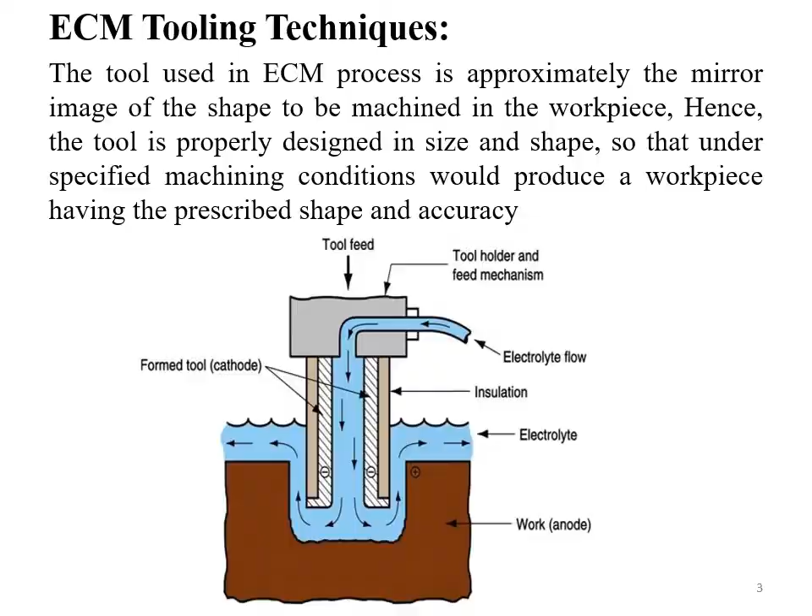Electrolyte-through electrode and insulated electrode - these two types of electrodes, or rather two types of tool configurations, can be used. In one, through the tool itself, the electrolyte is impinged or sent to the working zone, that is the machining zone, as we can see in the first diagram.

Here we can see the workpiece as the tool moves towards the depth of the workpiece. There is a peak observed at the center of the tool, because the electrolyte is passing through a hole provided at the center of the tool. The flowing electrolyte will flow to either side, forming a peak at the center, meaning machining will not happen at that center point on the workpiece.

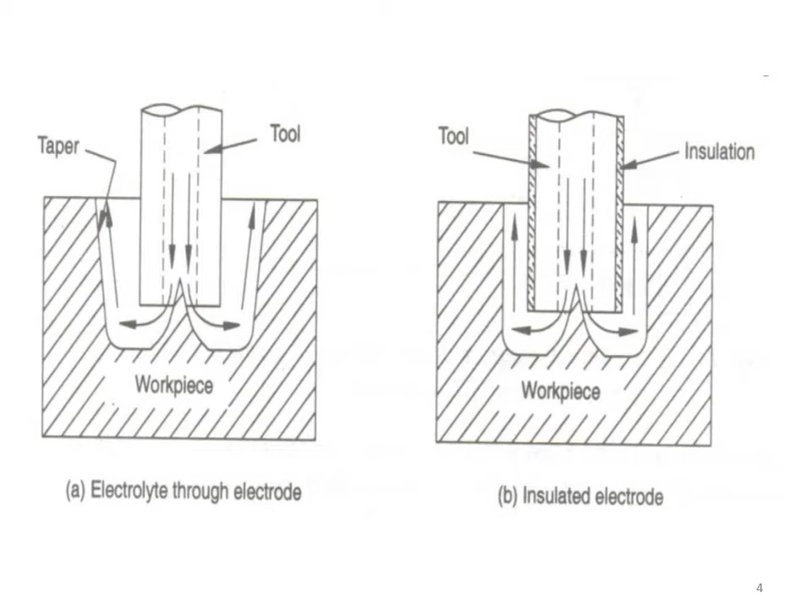Actually, in general machining process, this is being removed in the secondary machining operation. The third one is like a streamlined electrolyte flow.

Here we can observe the peak which is obtained in the last diagram, the second diagram. That can also be minimized with the help of the tool tip by providing extra insulation at the tool tip. When the tool tip is provided, it causes the electrolyte to flow in a maximum manner at its bottom, so that the material is removed with the minimum peak at its center.

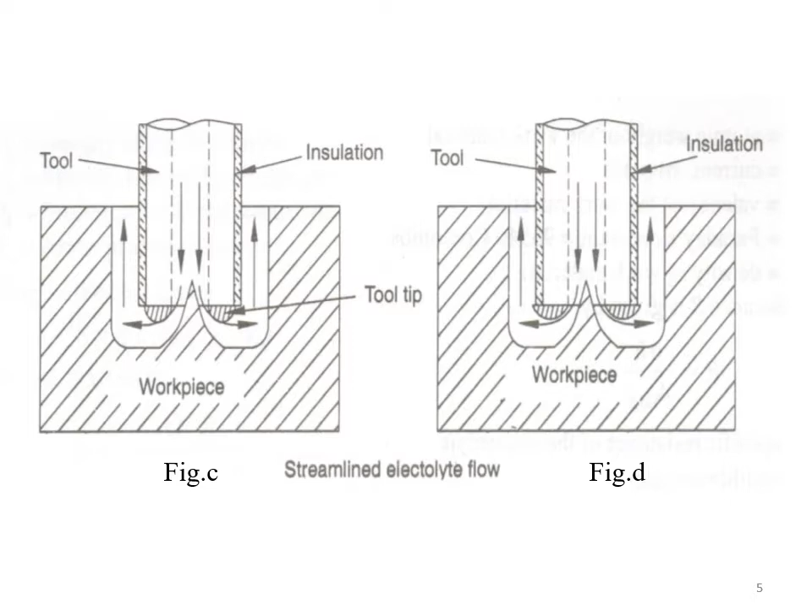This kind of electrolyte flow, we call it a streamlined electrolyte flow.

In the last four diagrams, we have seen that electrolyte will flow into the tool, or from the center of the tool it will flow into the workpiece and exit outside the tool. Whereas in this case, this is a reverse process compared to the others we have seen, where the electrolyte is made to flow from the outside and exit from the center of the tool, so that the electrolyte flows from its outermost side into the tool and gets exit from the center of the tool.

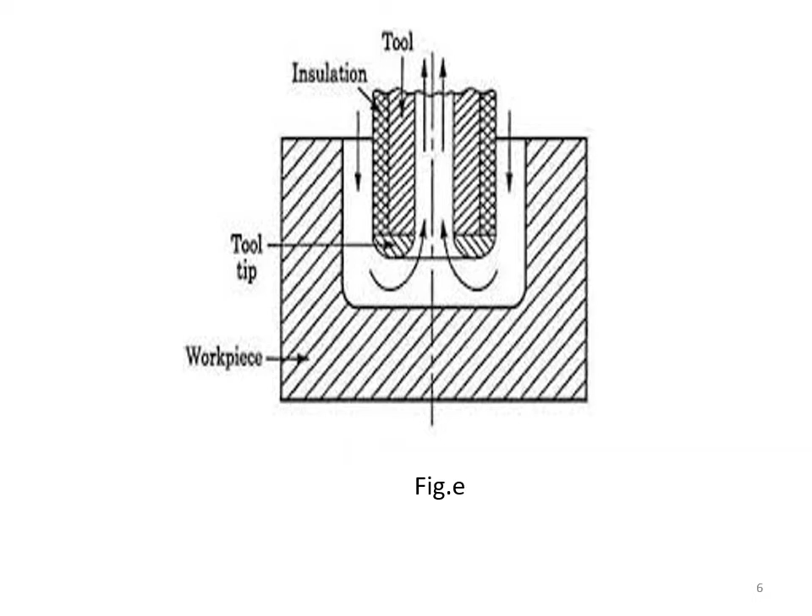It provides a better cylindricity of the hole, and narrow holes can be obtained. But it has its own disadvantages, like it is very difficult to maintain proper flow. It is very difficult to control the flow of the electrolyte. All those are some of the challenges which lie with this electrolyte flow arrangement.

Proper electrolyte circulation is essential, as you have seen even in the diagram, for accurate machining in the ECM process. The tool must be properly designed to permit a uniform electrolyte flow in all machining areas, as insufficient or excessive flows produce undesirable effects during machining.

There are two arrangements for the flow of electrolyte in the ECM process. One is divergent flow and the second is convergent flow.

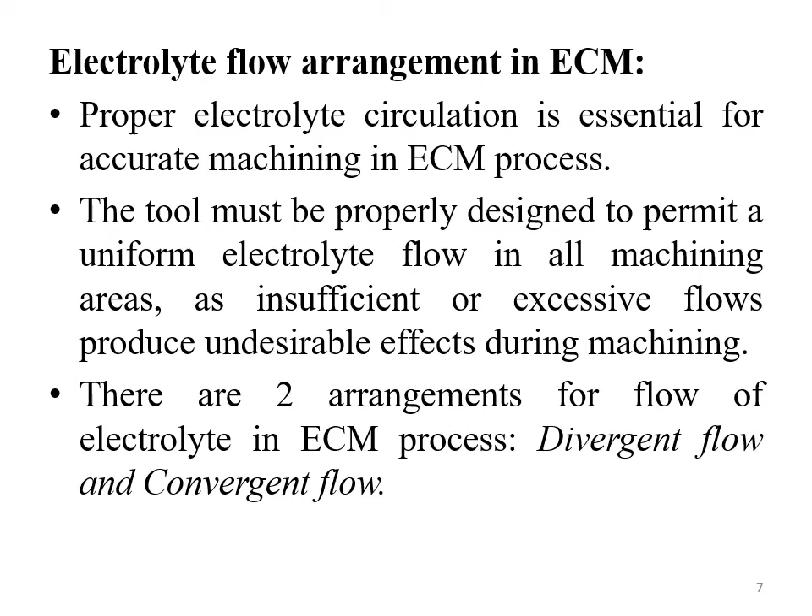The divergent flow, which is in the first figures we discussed, is what we call a divergent flow. The electrolyte is made to flow into the center of the tool, and when it gets exit, the electrolyte diverges and flows over the walls of the cylinder or tool, getting exit.

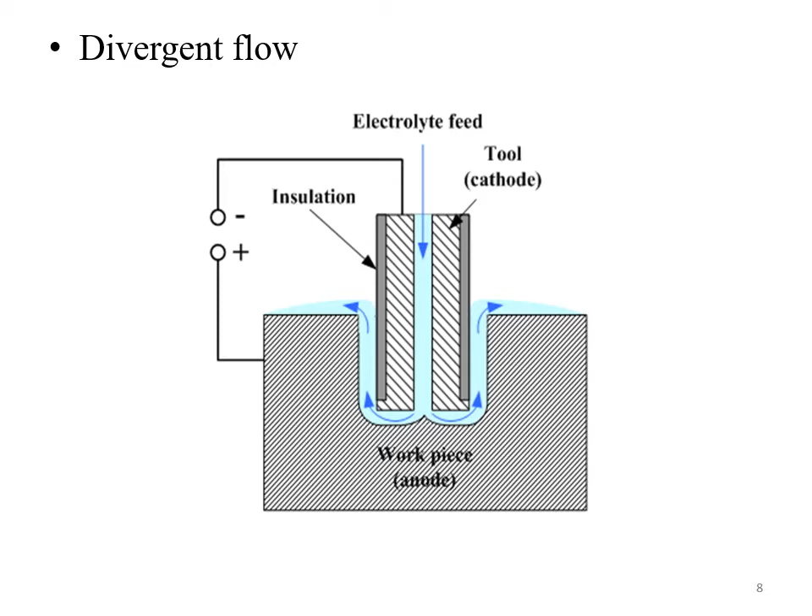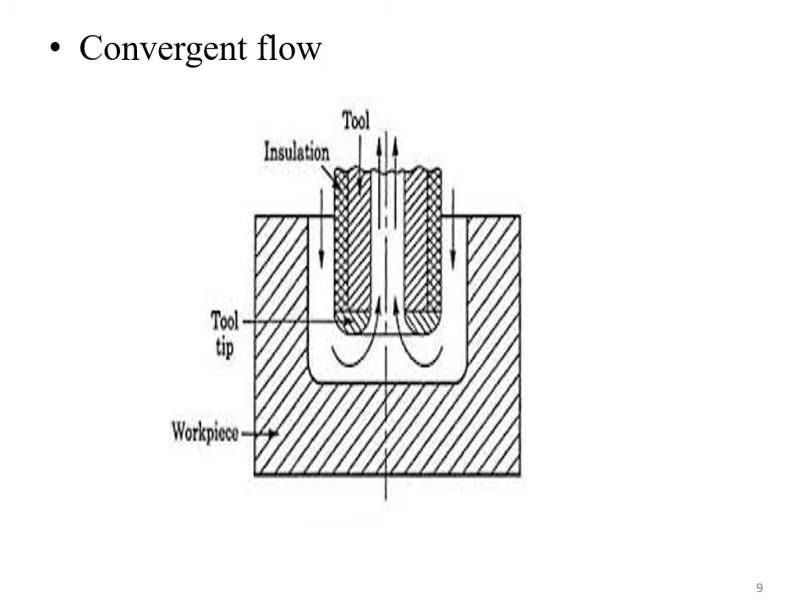Whereas in the convergent flow, the electrolyte will flow from the outside and converge at the center of the tool, getting exit from the center. This is what we call a convergent flow process. So these are the different techniques which are adapted for ECM tooling.

Next, coming to the process characteristics. Generally, when I mention process characteristics, we discuss two important things: one is material removal rate, second is the surface finish, because they indicate the quality of the machined area or machined workpiece. So machine quality is denoted by these two parameters. Further, accuracy is also another important characteristic.

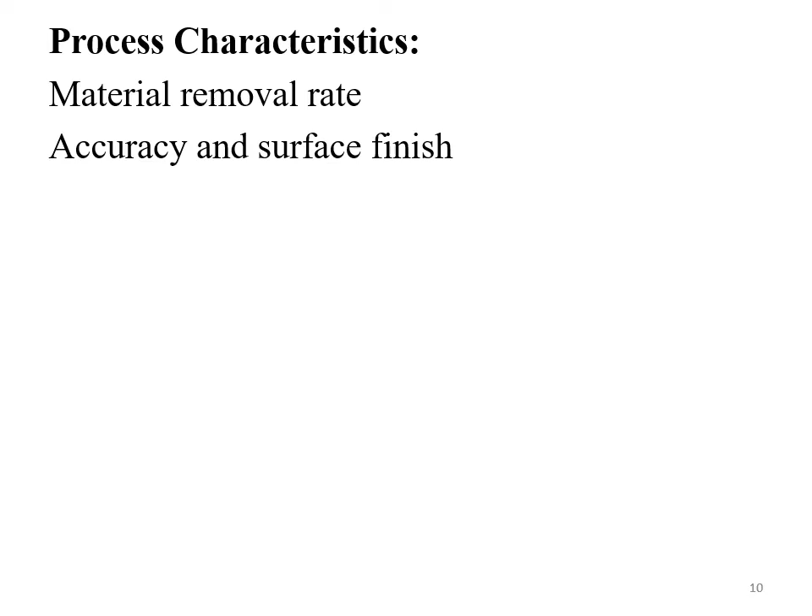Material removal rate, MRR, mainly depends on the feed rates, which determines the current that passes between the work and the tool. As much as a higher amount of energy is available at the working zone, that much material is removed.

As the tool approaches the workpiece, the length of the conductive current path decreases and the magnitude of the current increases. A stable cut is established when the current is just sufficient to remove the metal at a rate corresponding to the rate of tool advance. Proper control has to be provided to maintain fixed spacing to facilitate the highest MRR.

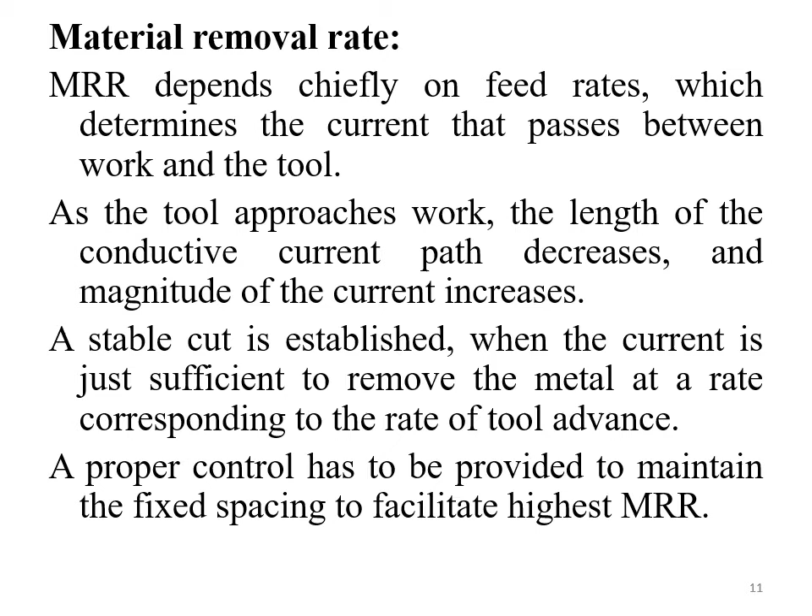Coming to the accuracy, some of the factors which govern the accuracy and surface finish are: one is machining voltage. The voltage variation changes the surface texture, as a higher voltage makes more overcut and vice versa.

Feed rate of the tool has the same effect as that of the voltage. The third one is about the temperature of the electrolyte, and the fourth is the concentration of the electrolyte. So let us consider the first one.

As I mentioned, based on the energy which is available, the material removal rate will be higher. When higher energy is available, it will cause larger displacement of material on the workpiece surface, so the crater size will be larger for maximum material removal.

When the diameter of the crater increases, the surface roughness also increases, because it increases the unevenness present over the surface of the workpiece. That's why the surface roughness generally increases with increase in current density, or the energy availability at the surface of the workpiece.

When the current energy available at the machining zone decreases, material is removed in smaller amounts per instant. This means smaller craters are formed due to the removal of workpiece surface material. An infinite number of small craters attach together to form the surface of the workpiece, and because of the smaller crater diameter, the surface finish obtained will be very good, or the surface roughness will fall down. The unevenness present over the surface will also decrease.

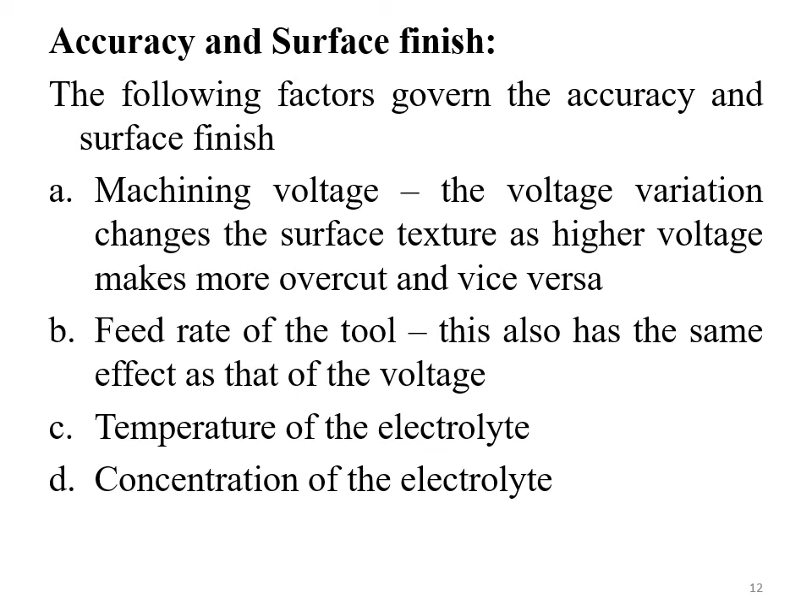Next is about the process parameters. In ECM, electrochemical machining, the important parameters are: first, current density; second, tool feed rate; third, gap between the tool and the workpiece; fourth, velocity of electrolyte flow; fifth, type of electrolyte, its concentration, temperature, and choice of electrolyte.

Let us go with the first one, current density. As I mentioned, increase in current density increases the availability of energy for removal of material from the workpiece surface, so the material removal rate also goes on increasing. Further increase in current density may cause damage to the equipment. That's why a controlled higher current density is necessary to favor higher material removal rate, but also need to consider the required surface finish. Based on that, the optimal current density value has to be set or considered for operation.

Next is about the tool feed rate. Tool feed rate works in the same manner: the higher the tool feed rate, the better the material removal rate, but poorer the surface finish. At the same time, higher material removal rate is often desired, so a secondary finishing operation is done to remove surface material from the workpiece so that a better surface finish can be obtained.

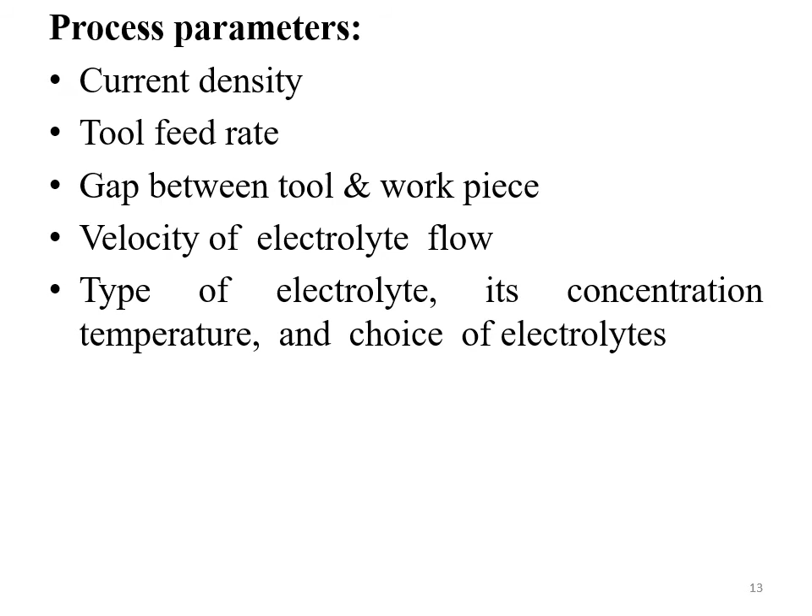Again, regarding temperature: the higher the temperature, the catalysis action takes place, and because of this the acceleration of the chemical reaction occurs, further increasing the removal of material. As for the choice of electrolyte, different types of materials are suitable for different types of electrolytes. So based on the type of workpiece being used, the suitable or appropriate electrolyte is chosen.

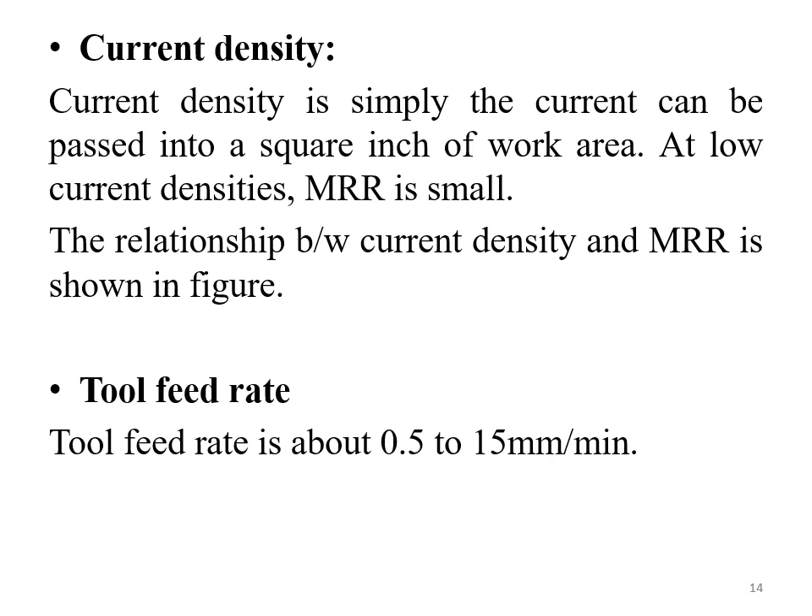Further, tool feed rate is about 0.5 to 15 mm per minute, which is the optimal value of tool feed rate employed. The current density, as mentioned, is simply the current passed per square inch of work area. At low current densities, MRR is low or small; at higher values, the MRR will be higher.

The gap between the tool and the workpiece is positioned as close together as possible to encourage efficient electrical transmission. A small gap results in higher current densities and more MRR. The gap size should vary from 0.25 to 0.76 mm, and a gap of 0.25 mm is often used. It is also important to maintain a uniform gap between the tool and the workpiece, since any physical contact between them will cause serious damage to the whole equipment.

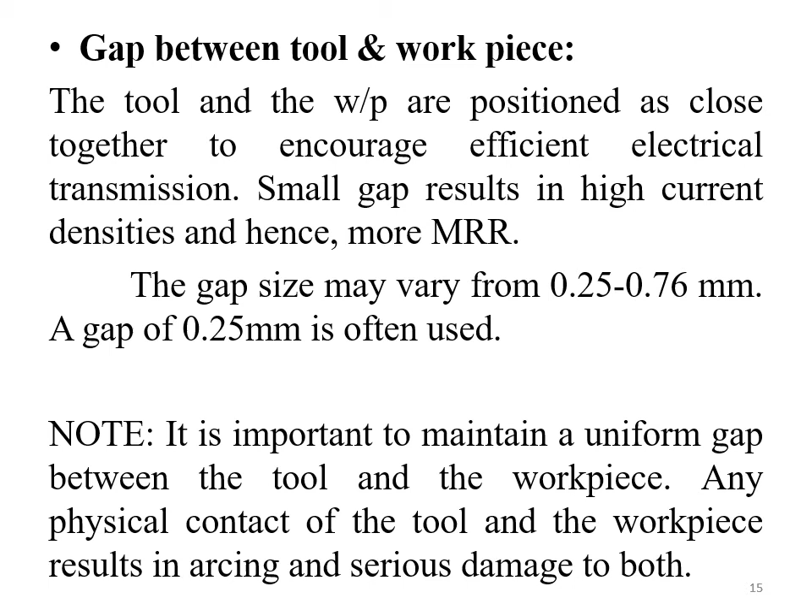Velocity of the electrolyte flow should be in the range of 15 to 60 meters per second. If the electrolyte flow is too low, the heat and byproducts of the electrolytic reaction build up in the gap, causing non-uniform material removal. Further, high velocity will cause cavitation, a serious issue where high velocity fluids flowing over surfaces cause bubbling or cavitation. In the same way, when the electrolyte is transported at a very high rate, it causes cavitation on the tool itself, so that the tool also gets worn out.

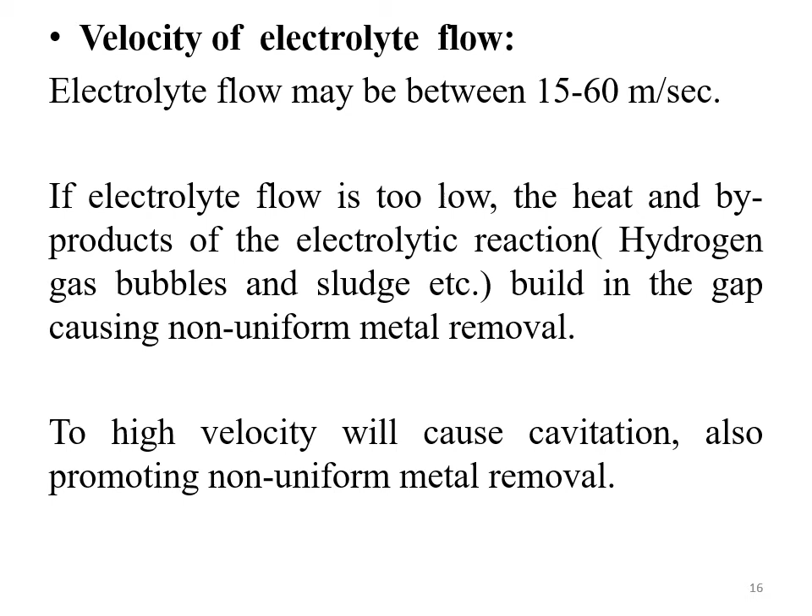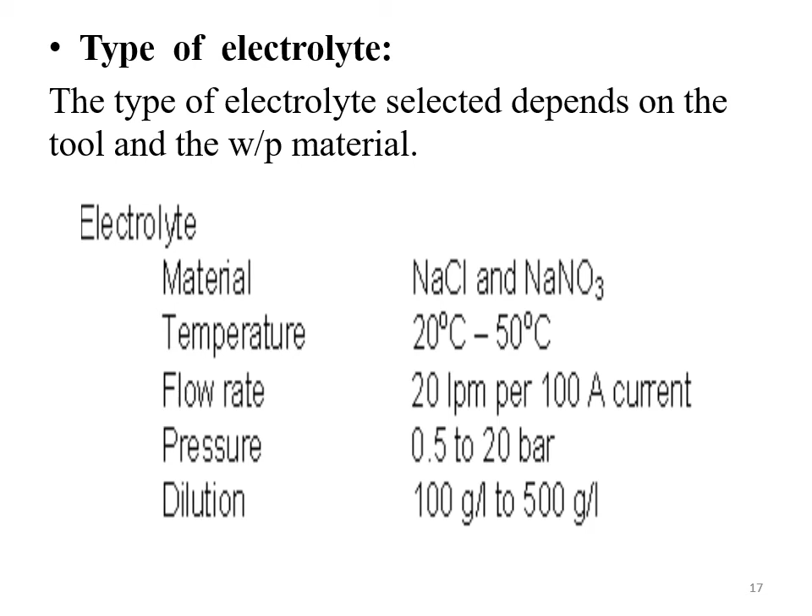That's why an optimal value of velocity also needs to be maintained. Types of electrolytes, like materials NaCl and NaNO3. Electrolyte temperatures are in the range of 20 to 50 degrees Celsius. Flow rate is 20 liters per minute for up to 100 amps current, a very high current. Pressure is 0.5 to 20 bars. Dilution is about 100 grams per liter to 500 grams per liter.

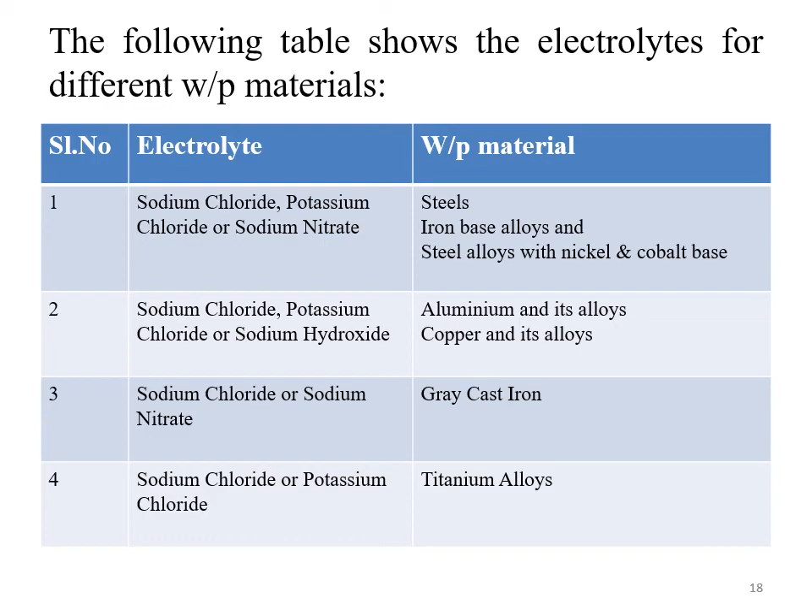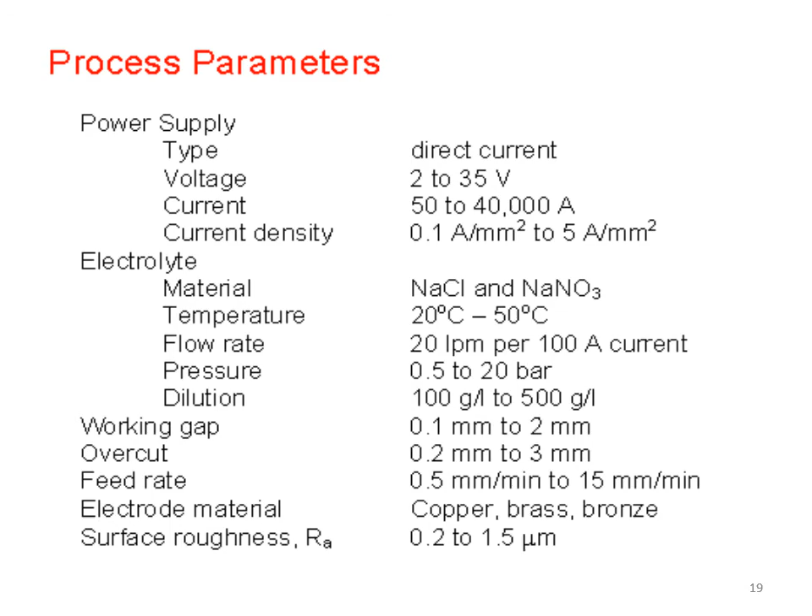These are some of the process parameter variables which can be considered as optimal within the range. The general machining is being done. ECM machining is done using tool and insulation materials.

Insulation is also very important in the control of electric current, because high current is being employed here. Generally, the simplest method of applying insulation is by spraying or dipping. Teflon, urethane, phenolic, epoxy powder coatings, and other materials are commonly used for insulation, and sprayed or dipped coatings of epoxy resins are amongst the most effective insulating materials.

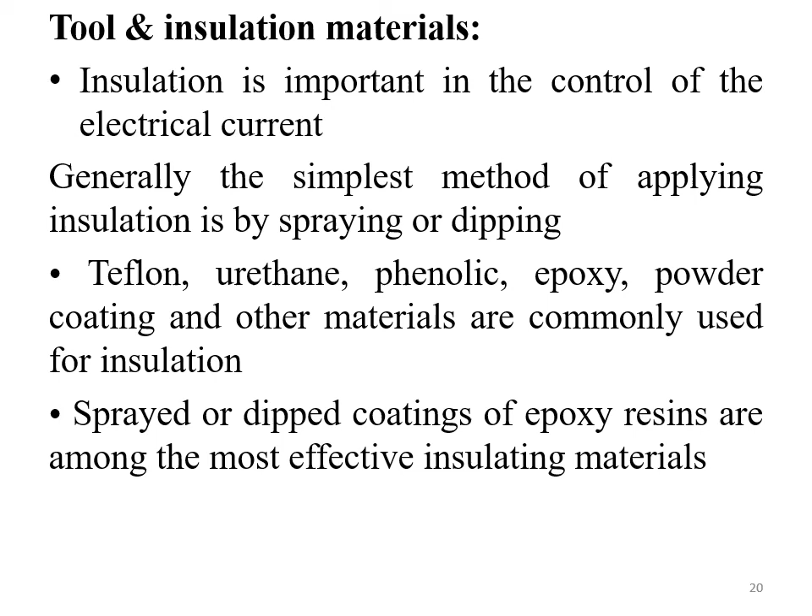Advantages: accurate shape with better surface finish can be obtained. Machines complicated shapes in a single pass. Capable of machining metals and alloys irrespective of their strength and hardness. There is little or no tool wear.

The process can be easily automated, giving good surface finish, accuracy and tolerance. Low machining time. Deep holes can be made by this process, and it is suitable for mass production applications.

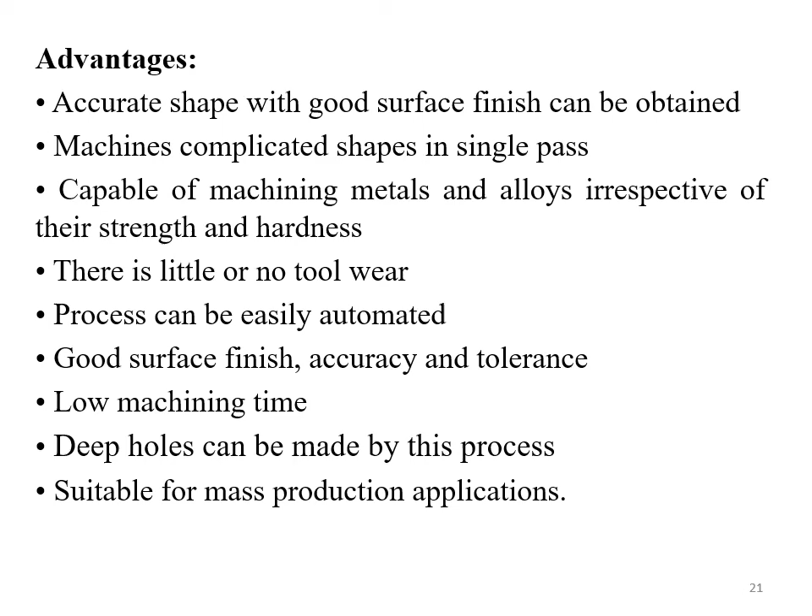Coming to the limitations now: ECM is mainly suitable for only metals, or nothing but electrically conductive materials. High electric power is consumed, so a high amount of energy is utilized here. Maintenance cost is also high, because high maintenance is a necessary aspect here. High tooling and setup cost increases the initial cost of the whole setup to establish an ECM setup.

Post machining and cleaning is a must to reduce the corrosion of the workpiece, or else whatever chemicals are used during ECM will cause corrosion after machining, especially on the machined surface.

It possesses an inability, or it is not able to machine very sharp edges or corners easily. So it is incapable of machining sharp edges or interior edges especially, and corners.

It is limited for mass production because of high tooling and setup costs, as I mentioned in the fourth point itself. This causes high tooling and setup costs, or the initial cost is very high. So obviously we cannot go for single component production because it will finally affect each component's cost. That's why mass production is better. For mass production, ECM tooling and ECM machining is a better alternative.

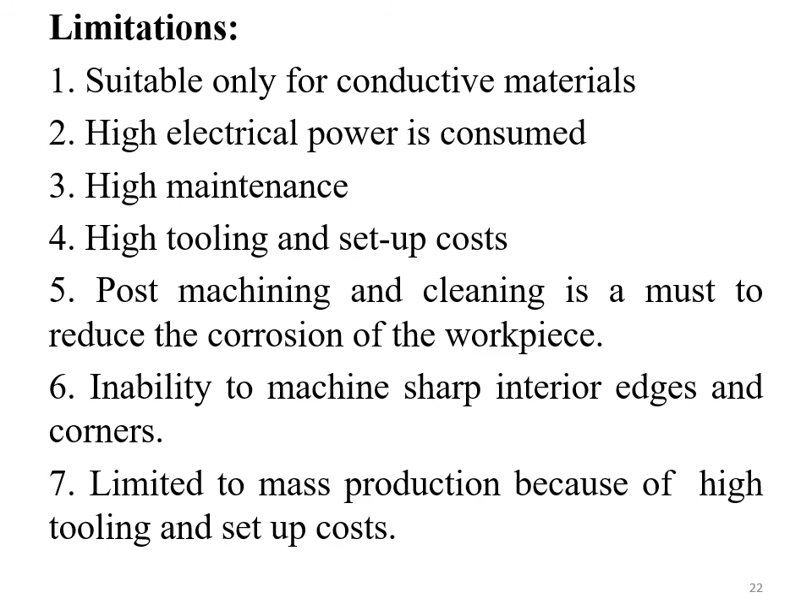Applications: aerospace industries, machining gas turbine blades, airframe component fabrications, honeycomb aircraft panels, jet engine blade airfoils, manufacture of general machine parts, thin wall mechanical slotting, difficult-to-machine hollow shafts, chain pinions, internal profile of internal cams, driving joints, pump glands and impellers, connecting rods, hydraulic spools, gear wheels, facing and turning complex 3D surfaces, die sinking, particularly deep narrow slots and holes, profiling and any odd shape contouring, multiple hole drilling, trepanning, broaching, deburring, grinding, honing and cutting off.

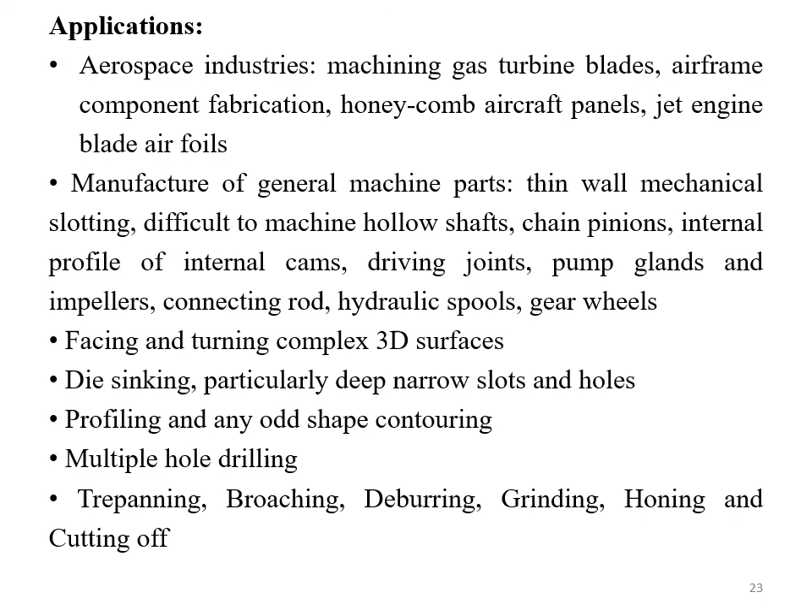Thank you. Regarding ECM, I think I have covered a lot of the aspects which are possible and limited within the scope of the VTU syllabus.